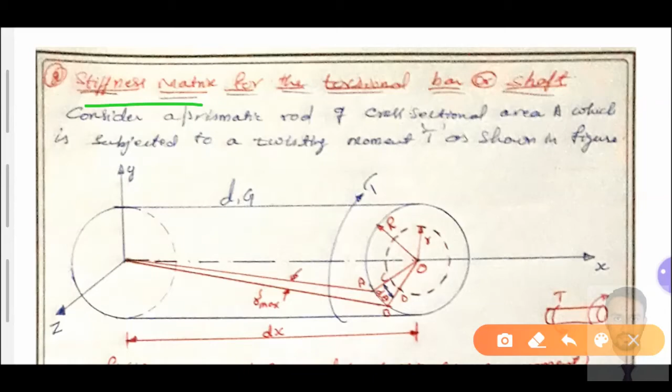Hello my dear friends, in the last video we learned how to derive the shape function for a torsion of shaft element. Now the next bit of shaft analysis is the stiffness matrix for torsion of shaft or bar element. We have here the stiffness matrix for torsional bar or shaft.

To find out the elemental stiffness matrix for torsion of shaft, consider a prismatic rod of cross-sectional area A which is subjected to a twisting moment T as shown in the figure.

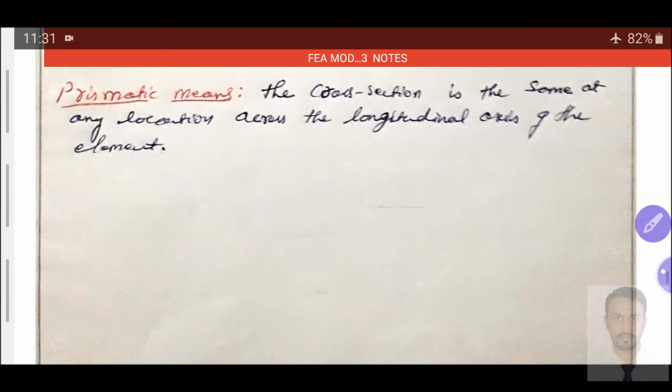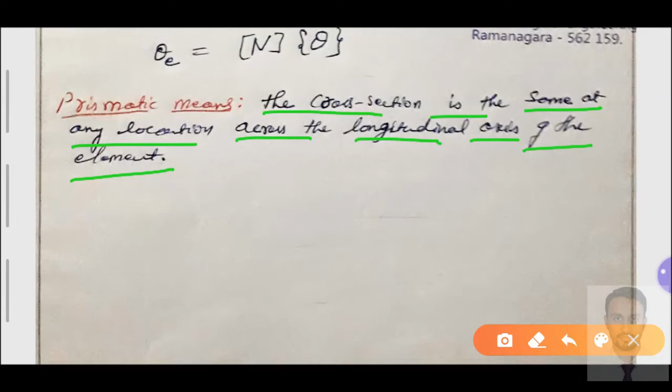I am saying here we are considering a prismatic bar element. What is this prismatic bar element? Prismatic means the cross section is the same at any location across the longitudinal axis of the element. Then we say such type of element is a prismatic element.

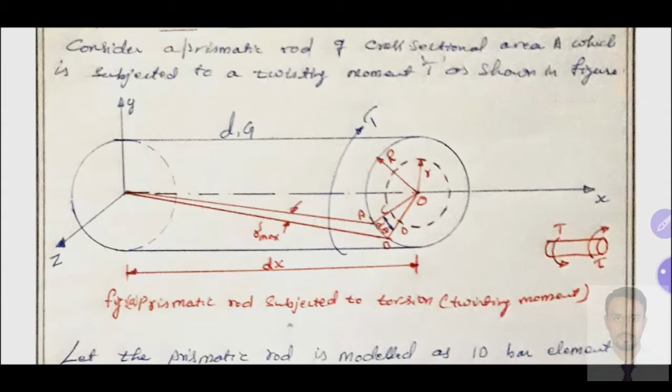We are considering a uniform cross-sectional shaft element. We are not varying the cross-section of the element. Uniform cross-section and uniform properties we are considering to derive the elemental stiffness matrix. That is one of the assumptions when we consider it prismatic, which is understood.

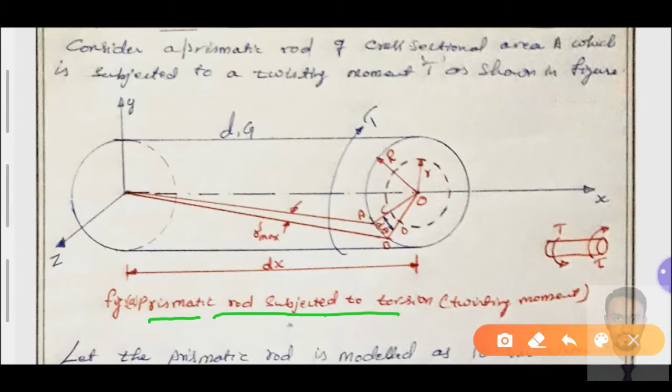The figure shows a prismatic rod subjected to torsion or twisting moment. When I apply torsion to the shaft, that elemental body we have taken here, representing along the x, y, z axis. When I apply the torque on the shaft, this end is assumed as fixed.

When I apply the torque in the counterclockwise direction, the twist will take place. The axis is shifted from A to B. When the axis is shifted from A to B, there will be a shear strain induced in the member, equal to gamma max, within the elemental length dx, and the radius of the shaft is equal to r. The diameter of the shaft is equal to d, and modulus of rigidity G.

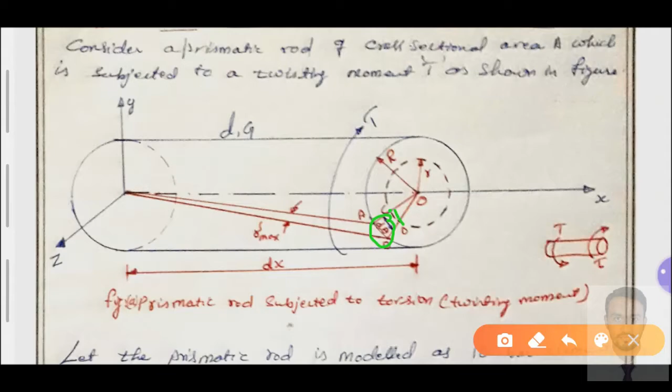When we consider an elemental body within the cross section of r or d, the axis gets shifted by an angle d theta from C to D, with a radius of small r from the origin O.

Then to derive the stiffness matrix, we know that when the shaft element is subjected to a torsion T, it is converted in terms of an FE model. The prismatic rod is modeled as a 1D bar element having 2 nodes and 1 degree of freedom at each node.

The given shaft element has been converted into an FE model which has 2 nodes, node number 1 and node number 2. Each node has a single degree of freedom: theta 1 at node number 1 and theta 2 at node number 2. Torque has been applied: T1 at node number 1, T2 at node number 2. Length of the element is L.

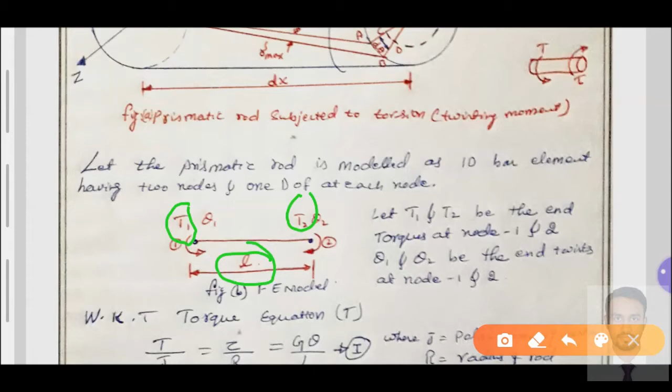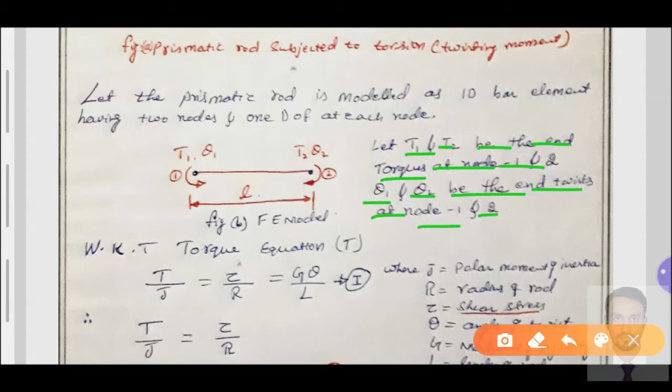We have considered the FE model where T1 and T2 are the end torques at node number 1 and 2, and theta 1 and theta 2 are the end twist or torsional deformation at node number 1 and 2. We know this generally. Now to derive the stiffness matrix, we need to use the generalized equation.

We are very well aware of the equation when we apply torque on the element. We have used this in mechanics of materials and design of machine elements several times. The equation for pure torsion was derived in mechanics of materials in the 3rd semester, and the same equation has been utilized from the design data handbook to solve problems on torsion of shafts. In module 1, some simple problems were solved using this pure torque equation. Now we consider the same torque equation.

T by J is equal to tau by R is equal to G theta by L. This is equation number 1, where J is the polar moment of inertia, R is the radius of the rod, tau is shear stress, theta is the angle of twist, G is the modulus of rigidity, L is the length of the rod, and T is the torque. To derive the elemental stiffness matrix from this generalized torque equation, I will take the first 2 elements of this relation: T by J is equal to tau by R.

We have applied a torque on a shaft element. Rearrange this equation in terms of torque: T is equals to J by R into tau. See here, torque T is equals to J by R into tau.

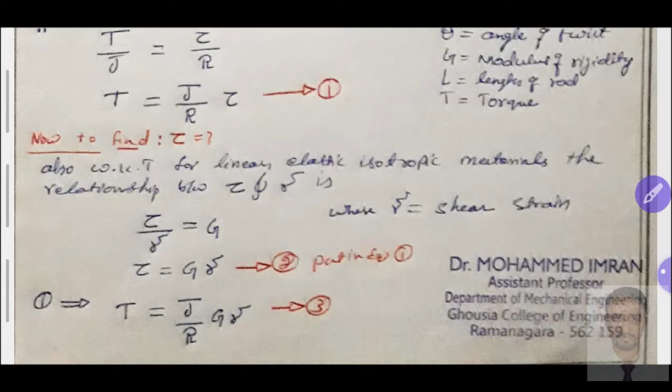G is the modulus of rigidity. That equation we have taken here, the relationship between shear stress and shear strain: tau divided by gamma, shear stress divided by shear strain. The ratio of shear stress and shear strain is equals to the modulus of rigidity G, where gamma is the shear strain.

Now we want the shear stress in equation number 1. So tau is equals to G into gamma. We need to bring the shear stress in terms of shear strain, where tau is equals to G into gamma. Call it equation number 2.

Put this equation number 2 in equation number 1. We get torque T is equals to J by R into tau, which is equals to G into gamma.

Why have we brought this equation in terms of shear strain? When I apply the torque on this shaft element, the maximum shear strain can be found easily by shifting the axis from one point A to point B with the help of an arc. But shear stress is quite difficult to find, so that is the reason we are considering an elemental body.

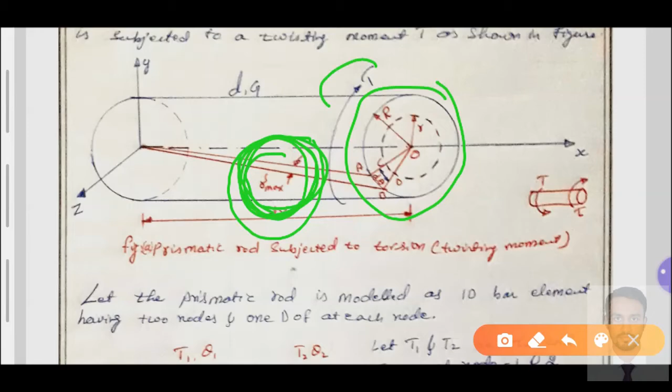We know very well, based on the characteristics of this diagram, we can easily get the maximum shear strain induced in a shaft element due to the application of torque. That is the reason we have converted this torque equation in terms of shear strain.

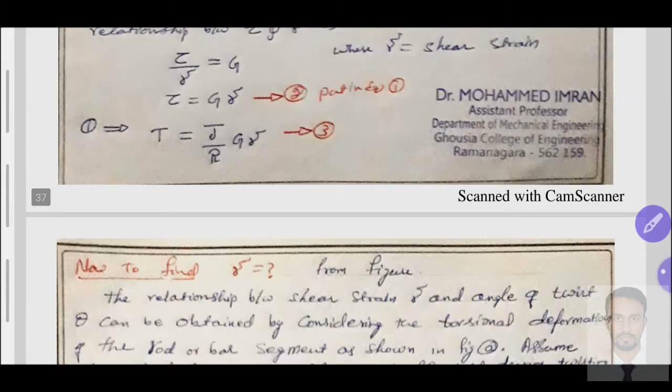Call it equation number 3. This equation still has one unknown parameter, the shear strain induced in the member. So we need to bring this shear strain in terms of known parameters of the given problem.

To find the shear strain from the figure, the relationship between shear strain gamma and angle of twist theta can be obtained by considering the torsional deformation of the rod or bar segment shown in figure A, assuming all radial lines such as OA remain straight during the twisting or torsional deformation.

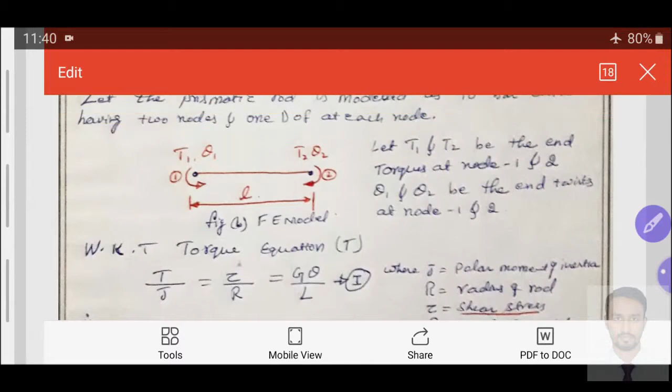Considering origin O representing from this point to the twisting moment at point A, the twist occurs which in practical application may be an irregular shape, but we are considering all lines moving from O to A as uniform.

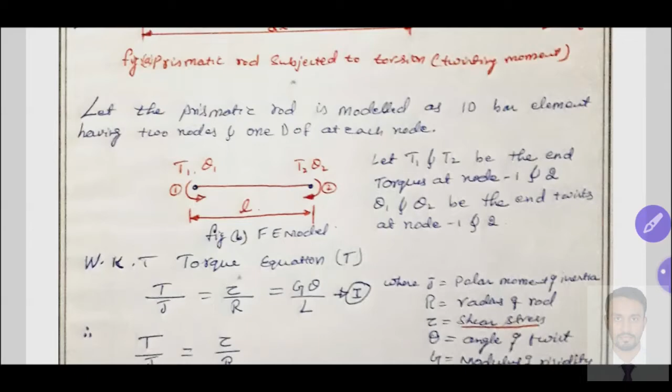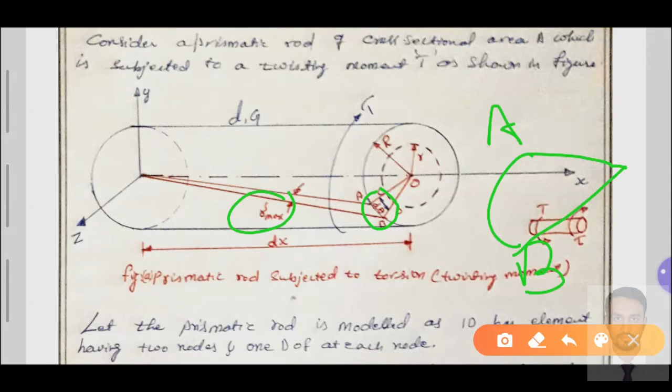Then arc AB becomes, from the figure, gamma max into dx. We have this arc AB becomes gamma max into dx. This displacement length is dx. Similarly we have this one, which is also d theta into r.

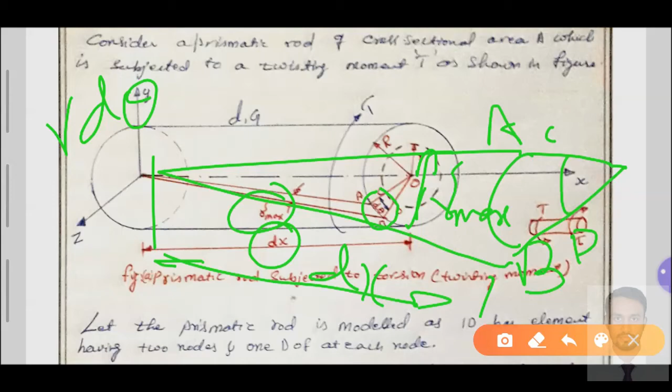We have the arc portion, then gamma max into dx is equals to r d theta. We have that relationship here. The arc AB, this is the shaft radius r from the center of the shaft, and then the axis has been shifted like this.

The maximum strain induced, gamma max, is within the elemental body dx. The angle of twist takes place as d theta. R into d theta, which is equals to shear strain maximum into dx. From the figure we have arc AB is equals to gamma max into dx, is equals to r d theta.

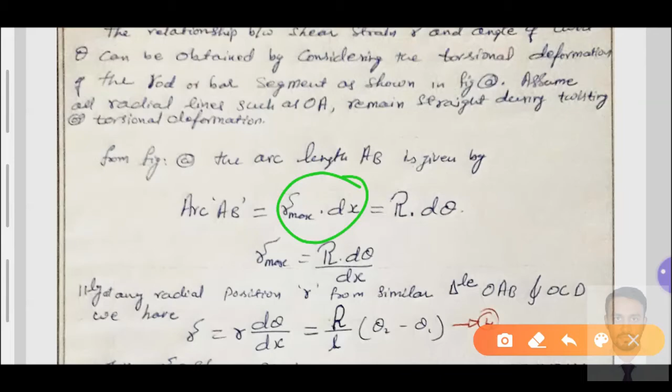This is a longitudinal effect, and this one is a radial effect. Longitudinal effect of torsion is equals to radial effect of the torsion. Now rearrange this equation.

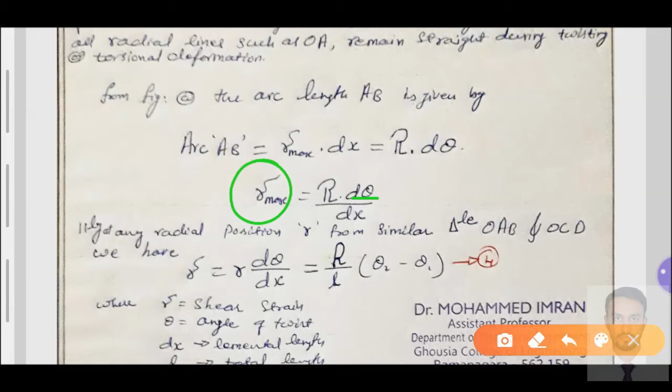Gamma max is equal to r d theta divided by dx. We have found gamma max, but it is still in terms of an elemental body. We want a globalized elemental stiffness matrix, so we need to get the elemental stiffness matrix. We split these values in terms of theta 2 and theta 1, and dx becomes x when integrated.

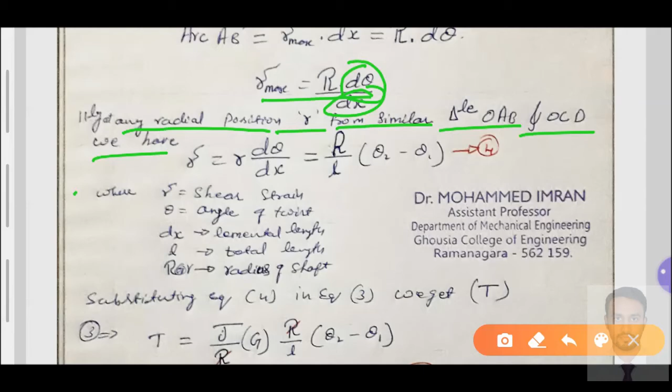Now similarly, the radial position r from the similar triangular elements OAB and OCD we have. From the similar triangle OAB, OCD we have - here you can see triangle OAB and triangle OCD.

For triangle OAB, we have gamma max which equals r into d theta divided by dx. Similarly for OCD, gamma max equals small r into d theta divided by dx. For both triangles it remains the same, since we have taken a small radial element. Either you can take that equation or this equation, both remain the same.

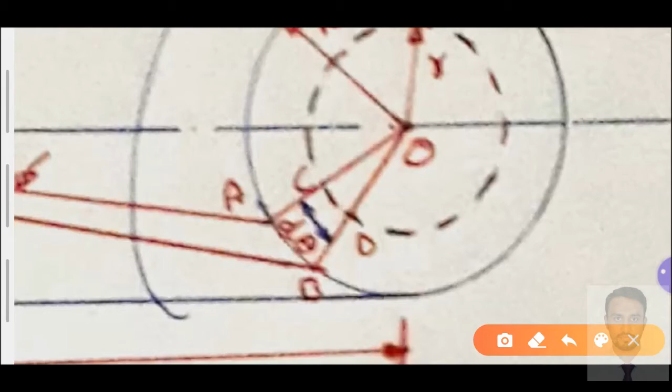Now gamma max, for this finite element body, shear strain gamma max equals r into d theta divided by dx. Here dx means length L, d theta is the change in angle of twist, that is equal to theta 2 minus theta 1, based on this FE model. So d theta equals theta 2 minus theta 1, where dx equals L.

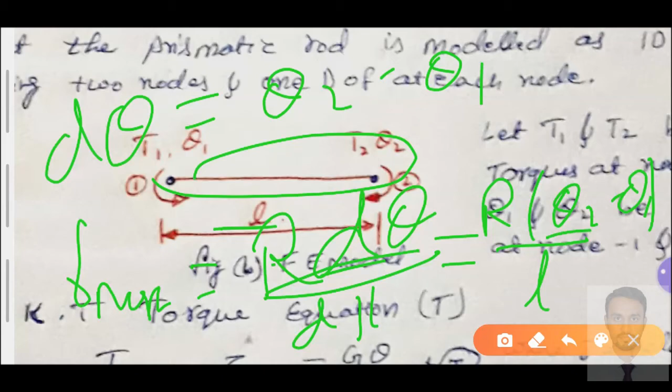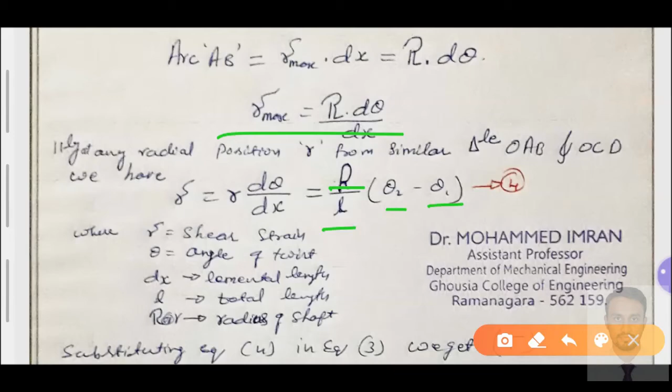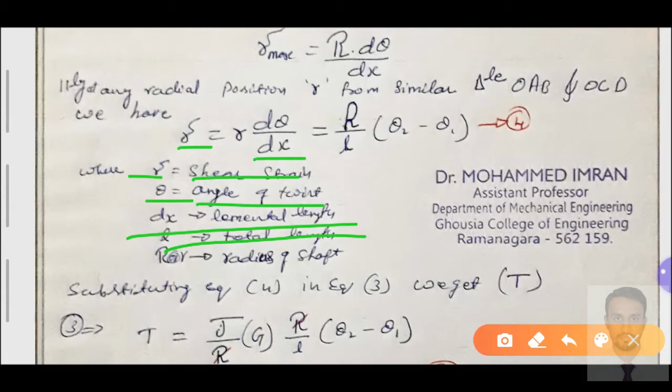Now substitute all those values here, then this maximum shear strain becomes r divided by L, theta 2 minus theta 1, call it equation number 4. Here gamma is shear strain, theta is angle of twist, dx means elemental length, L means total length of the element, and r is the radius of the shaft.

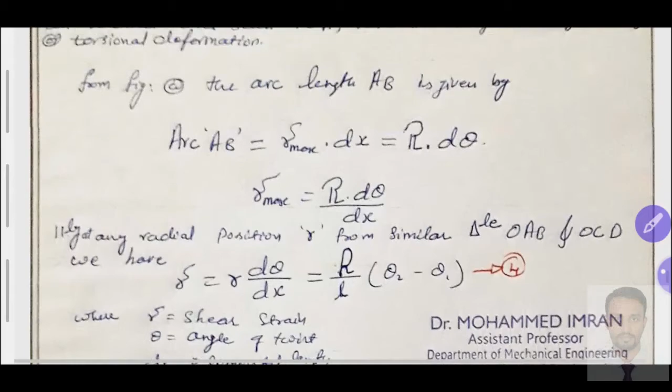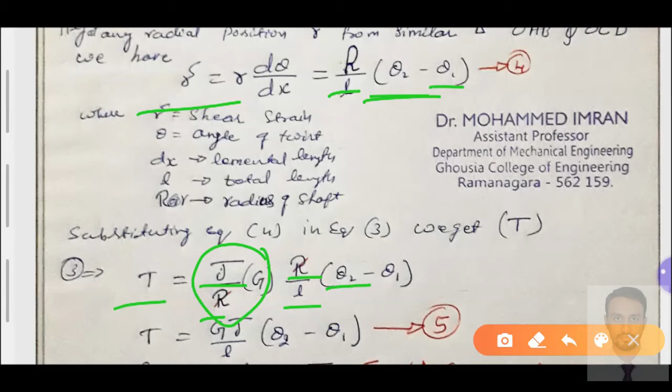Now substituting equation number 4 in equation number 3, we get torque T. We have equation number 3: T equals J by R G into gamma. That equation becomes T equals J by R G, this remains same. The gamma value we have is R by L into theta 2 minus theta 1. Substituting all those values, R gets cancelled, and we get JG divided by L, theta 2 minus theta 1, called equation number 5.

Now we got the generalized equation for torsion of a shaft element. Now we need to apply the boundary condition for a given element. We need to consider some characteristics to derive the elemental stiffness matrix for torsion of a shaft element. Those assumptions we make here, you can check out.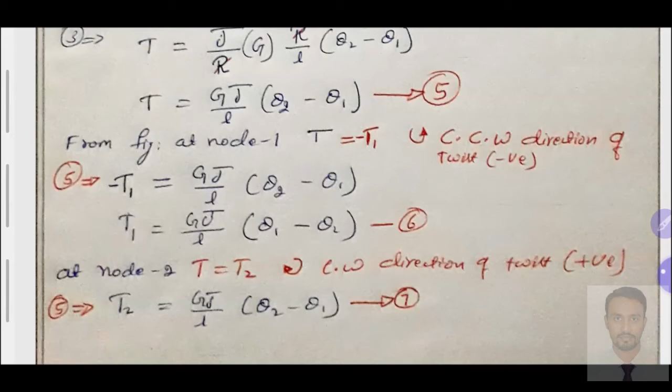At node number 1, torque has been applied in a counterclockwise direction, so it should be taken as negative. Torque applied at node number 2 is in a clockwise direction, so it should be positive. That means we have applied T1 and T2. This T value becomes minus T1 at node number 1 due to the counterclockwise torque application, and T value becomes T2 at node number 2, positive, due to the clockwise torque application. Based on these assumptions from the figure, we will apply the boundary condition.

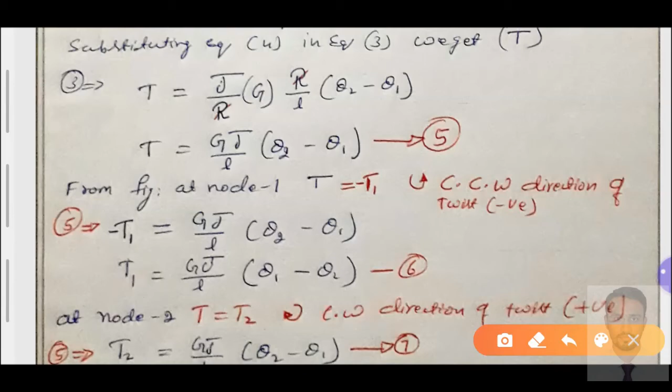Then what happens to equation number 5? Check it out. From the figure, at node number 1, T becomes minus T1, since counterclockwise direction of twisting moment is negative. So T equals minus T1. We take this as it is into equation number 5.

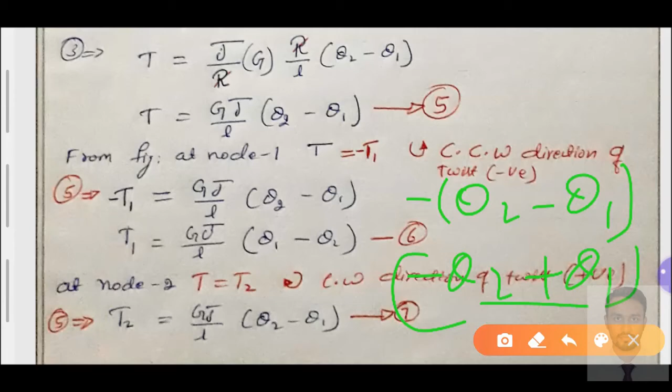Take the minus on the right hand side - what happens to this equation? The minus has been applied, so theta 2 minus theta 1 becomes minus of theta 2 minus theta 1, which becomes minus theta 2 plus theta 1. Just rearranging, we get theta 1 minus theta 2. Call it equation number 6.

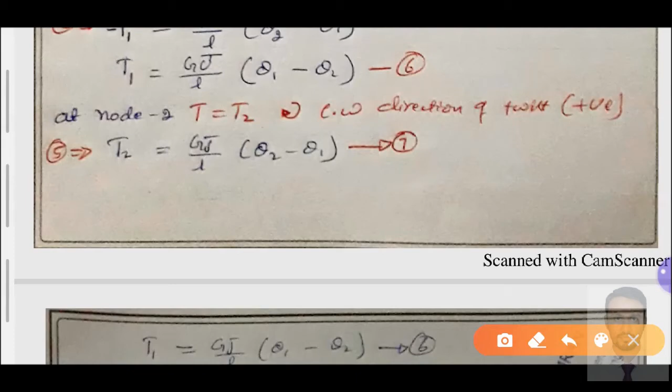Similarly, at node number 2, T equals T2, which in the clockwise direction is positive. Taking that as positive, using equation number 5 we derived, T2 equals GJ by L, theta 2 minus theta 1. Call it equation number 7.

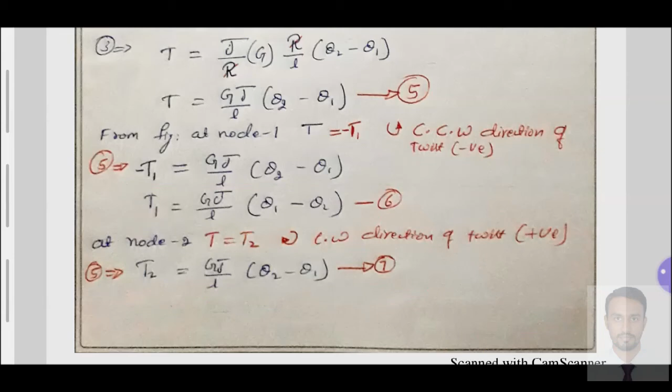There is no sign convention, nothing has changed, only t becomes t2. Now we have our two equations here, equation number 6 and 7. We'll convert equation number 6 and 7 into matrix form. I have copied this same, nothing changed.

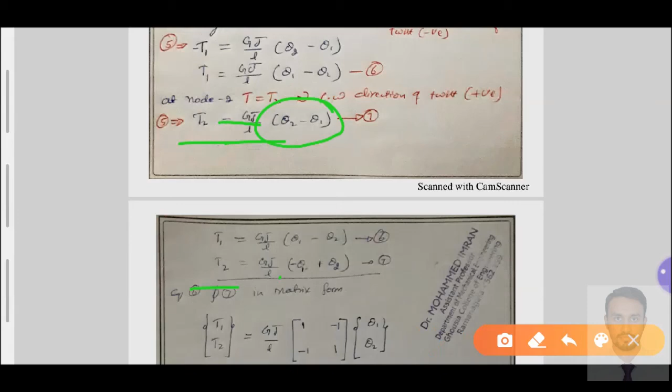T1 is equal to GJ by L, theta 1 minus theta 2, equation number 6. Similarly, t2 is equal to GJ by L. I have rearranged this equation as per first order and second order, minus theta 1 plus theta 2. Call it equation number 7 for our convenience.

Now converting equation number 6 and 7 into matrix form, t1 and t2 on the left hand side we have taken as a torque vector. GJ by L is common, and I have taken theta 1 and theta 2 separately as a displacement vector. Then theta 1 coefficient in equation number 6 is plus 1, theta 2 coefficient is minus 1. Theta 1 coefficient is minus 1 in equation number 7 at the first position, and theta 2 coefficient is 1.

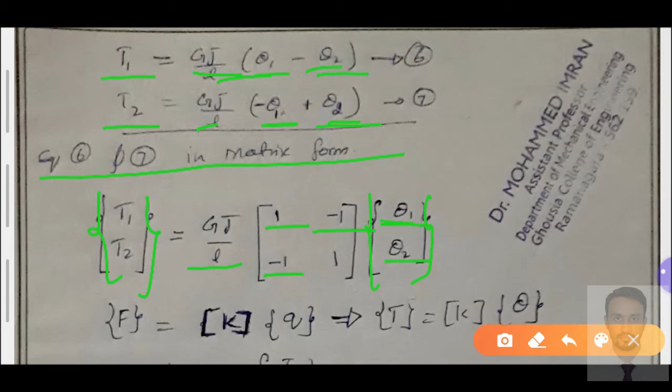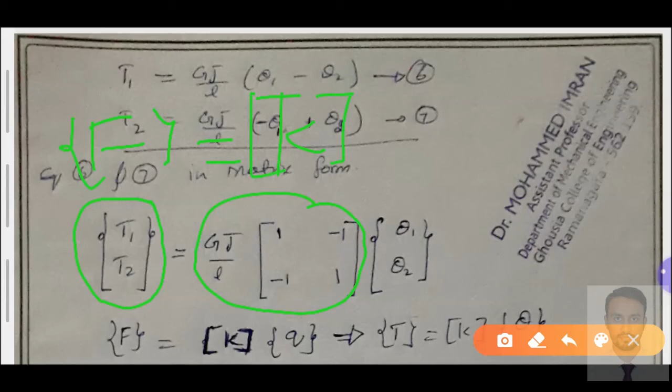When we convert equation number 6 and 7 into matrix form, we get F is equals to K into Q. This is called the elemental stiffness matrix for torsion of a shaft element. This one is the displacement vector, this one is the force vector. See here, F is equals to K into Q, or else we can take it as T is equals to K into theta. Either you can take this or this one.

This one is a better representation to understand. We already have used this notation, so there's some confusion. To reduce the confusion, remember this: both are correct. For a global displacement vector, you can take either Q or theta vector, but in the elemental displacement vector we need to take theta 1 and theta 2. This is the elemental displacement vector for torsion of a shaft, and the elemental stiffness matrix for torsion of a shaft.

F or T is equals to load or torque vector, where Q or theta is equals to angle of twist vector, and K is equals to GJ by L, 1 minus 1, minus 1 1.

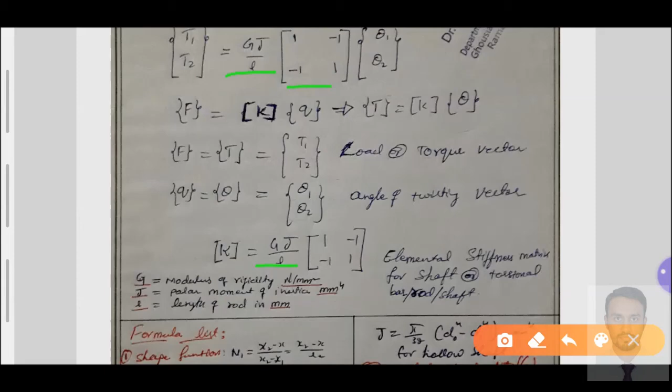See what you realize here in this matrix with respect to the bar: the bar has the same matrix, only the multiplying characteristic has changed. AE by L becomes GJ by L. If you put AE by L, this matrix is said to be for a bar. If AE becomes GJ, it is said to be the elemental stiffness matrix for a shaft. Carefully remember it: GJ by L, 1 minus 1, minus 1 1 — elemental stiffness matrix for a shaft.

Regularly we use this equation to solve problems. What is this G? G means modulus of rigidity, Newton per millimeter square. Units remain the same, right? There we used elemental stiffness matrix in a bar element, where E, Young's modulus, was taken. Here, modulus of rigidity is used instead — carefully remember it. J means polar moment of inertia.

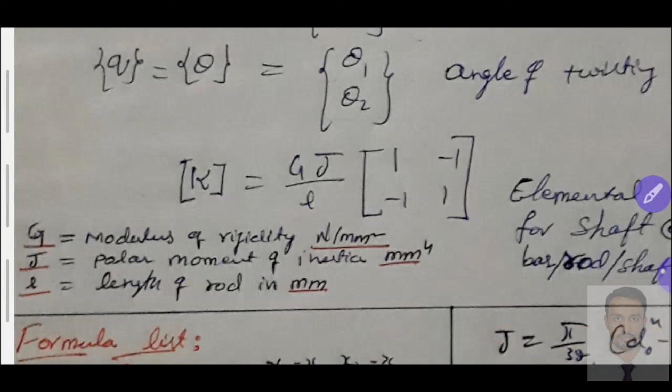There we used the area of cross section; here the polar moment of inertia is in millimeter power 4. This L is the length of the rod in millimeter. What are the units of this elemental stiffness matrix for a shaft element? Units you can easily get here. We have the modulus of rigidity unit, Newton per millimeter square, into J, polar moment of inertia, millimeter power 4, whole divided by length of the element in millimeter.

Power 4, one power cancels, leaving millimeter power 3 in the numerator with Newton per millimeter square, giving Newton millimeter as the unit. So in shafts, the stiffness matrix units are Newton millimeter, whereas in bars we have Newton per millimeter. The units have changed because rigidity modulus is multiplied with the polar moment of inertia here, whereas for the bar element we multiplied area of cross section and divided by length.

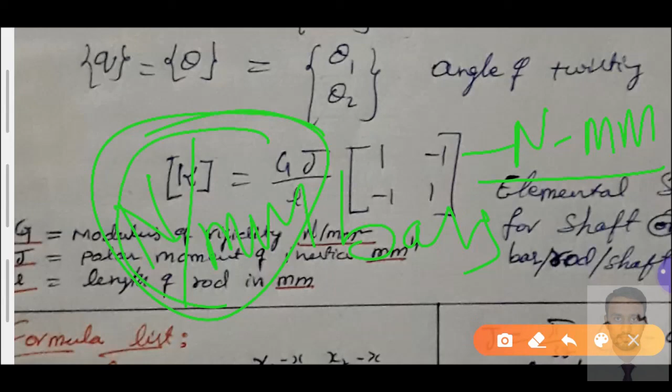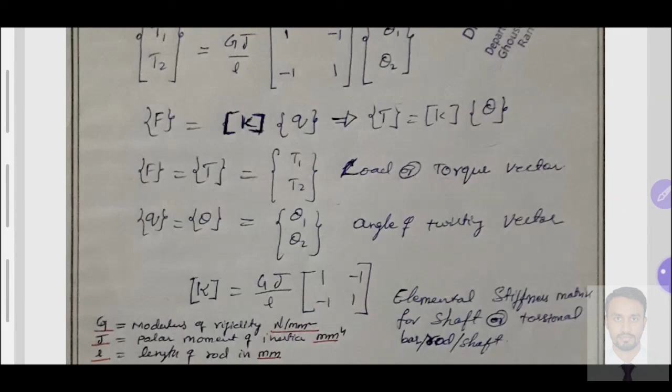Now we got the idea. Remember this equation carefully — you will use it while solving the problem. In the next video, I'll show you how to solve the problem and give you the formula list.